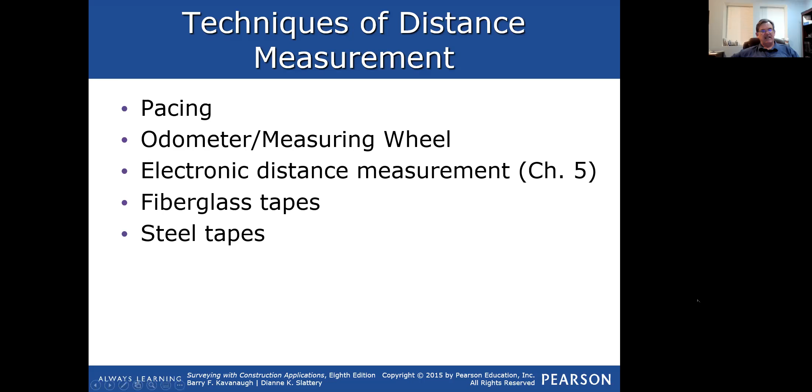The steel tapes were very accurate and very good, and it's just not something that is used as much anymore, but it works the same as any other type of measuring tape. So those are the types of measurements or the tools that you would use.

We're not really going to deal too much - I'm not going to ask you much about the steel tape, the graduations, or the cut tapes and add tapes. Let me see what this one here is. This is an add tape. All right, if you notice this, I'm not going to be able to zoom in too much here.

No, yeah, I can. I get it.

So a lot of tapes are measured directly. Some of them were like this. You'd hold it, and the tapes I saw had no intermediate graduations like this. So today you're not going to see too many of those. The book makes reference to it, but I don't think I asked you anything about it.

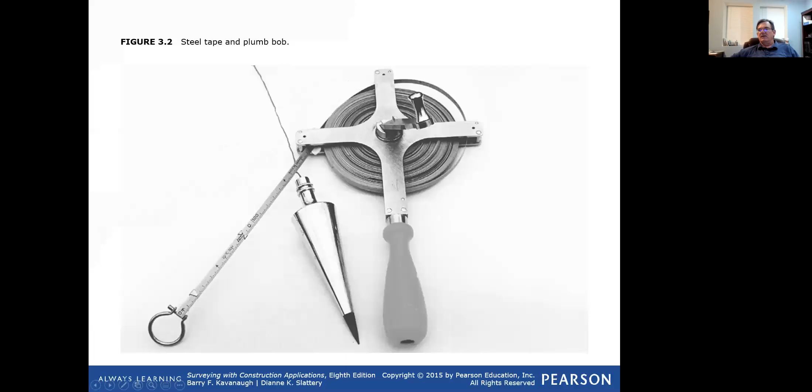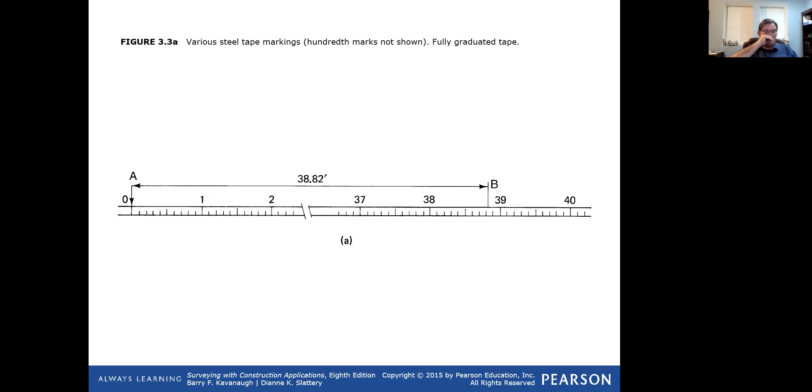You can see here various steel tapes. They're hundredths of a foot. You can buy fiberglass tapes done the same way, marked in hundredths of a foot, or you can buy them in inches. Surveyors work in hundredths of a foot, if you haven't figured that out by now. And the reason for that is it's easier than fractions. That is the main reason, it's simpler than fractions.

Let's see here, taping accessories, chaining accessories. If you're going to use a steel chain, you need a tension handle. If any of you have seen a fence, they have tensioners that pull the wire and make it tight. If you're working on a car and you want to take off your fan belt or serpentine belt, there's a belt tensioner that pulls the belt tight. Same thing with a steel tape. If we want to be accurate, we have to pull the tape at a certain tension, and that would be taken into account with this tension handle.

A lot of them actually had a little gauge on them to tell you how many pounds per foot you're pulling. Range poles are not something we're going to talk much about. A clinometer is something that measures your slope in percentages.

A hand level is literally something that you look at. It has a little bubble inside. One of my videos has a demonstration of a hand level. You look through it, you see a little bubble, and it tells you what's level at eye level.

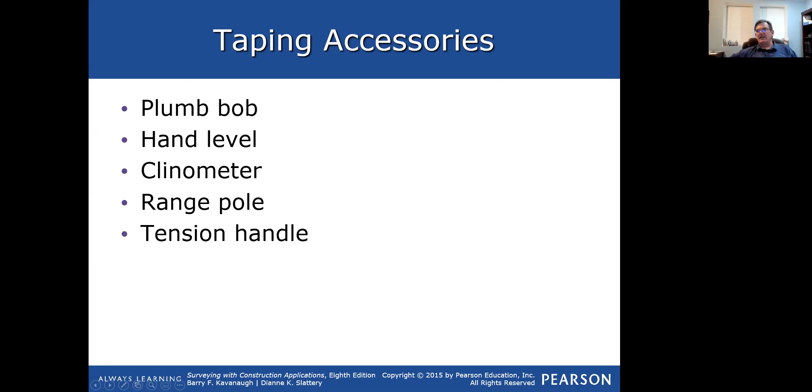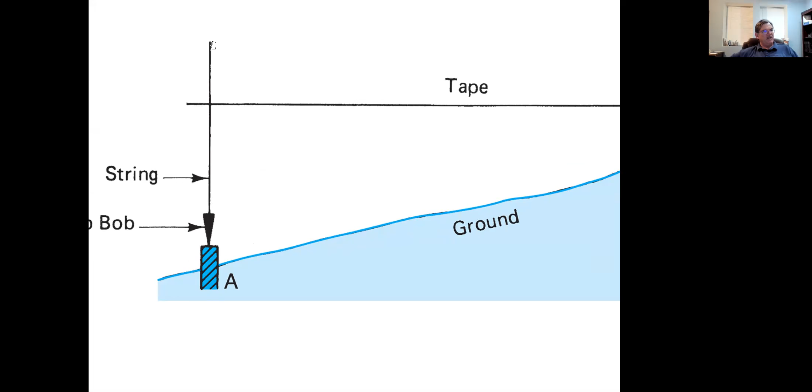And the plumb bob is something that we definitely want to draw attention to. The plumb bob is this shape, and somewhere there's going to be a picture of one, but it's this trapezoidal, triangular shape. It's a cone with a string on the end of it, and that always falls plumb to the center of gravity, so it makes this string a very taut, straight line for you to measure with. Plumb bobs are used by carpenters to check if a wall is truly vertical or not, or the word is out of plumb for something that would be crooked or tilting one way or another.

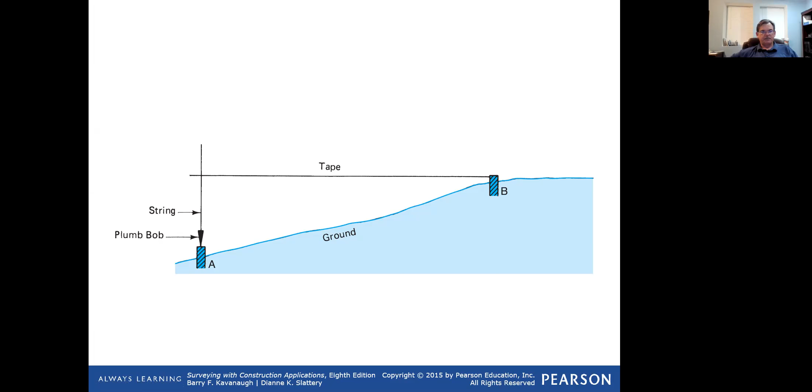This is a hand level. It's an old style one, but some people call them Locke levels. This right here, you can see on the inside, enabled you to look through something. As you tilted it up and down, you would find out when you were level, and then you would be able to read a location on a person's body or somewhere else that said, hey, this is level with my eye on that person, or that stake or stick or anything like that.

So they're fair. Not a lot of people have them anymore, but you see more of these being used in construction management and construction companies than you do by surveyors.

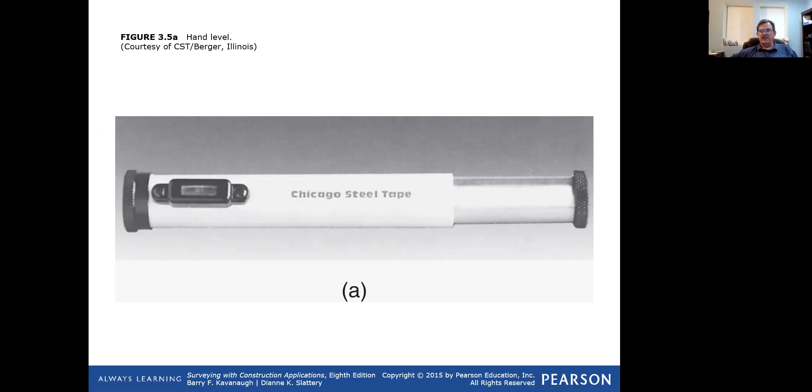And this is the application of it. You want to be able to measure horizontal distance, so you'd use this hand level, and you notice, hey, at my eyes, I'm level with your knee. And so you would now know that we could measure a distance right here, and it would be pretty close to a true horizontal distance.

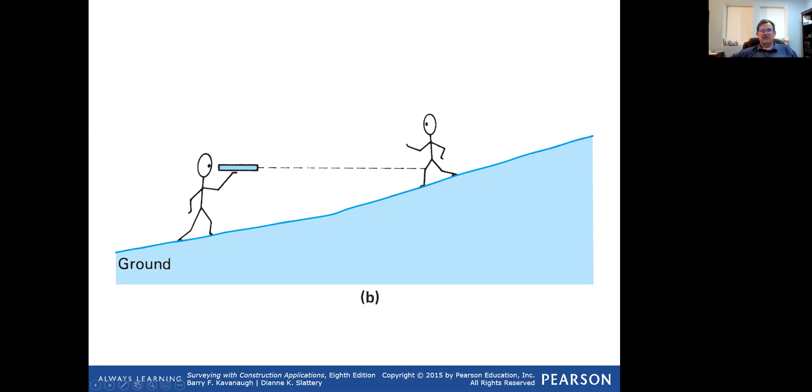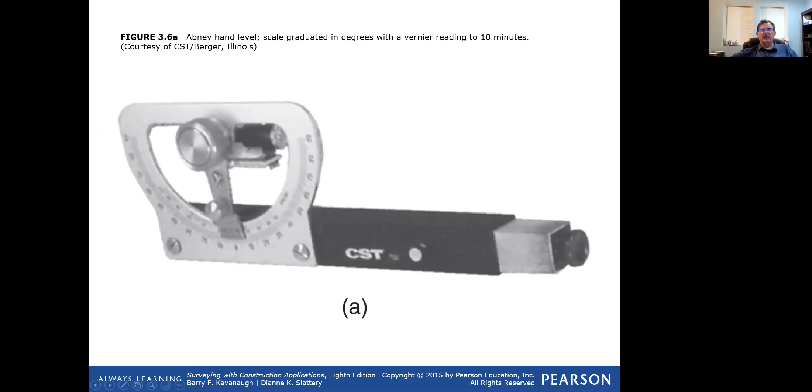This is a graduated hand level, not something used very often—I've never used anything like it. This book has old pictures of equipment. This part will help you look at an angle, so you could tilt it to look downhill at a 2-degree or 5-degree angle, or uphill at a certain slope. Just by adjusting this, it lets you know when you're looking up or down and perfectly straight. But I don't see too many of those anymore.

This type of setup, if you're trying to get over top of something and figure out the height, that's what it was talking about, using the hand level. People just don't do that too often.

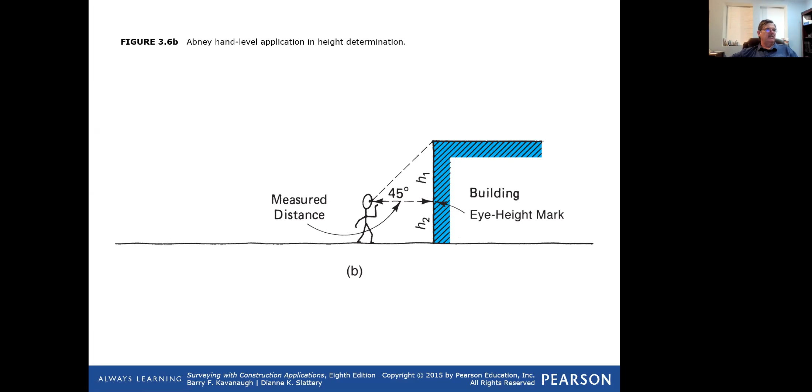I have had a field crew use a clinometer, which measured slope and height, and we were able to utilize it to measure the height of trees at the St. Mary's County Airport. Trees over a certain height were coming down, so we had the job of getting every single tree, getting a height, and putting a tag on it so somebody could determine whether or not it had to come down.

This type of diagram is something you would really do in life. You wouldn't really do it with the hand level and the tape though—you'd use something like this with a stadia rod, which we're going to talk about more in chapter 4, but it is something you would actually do.

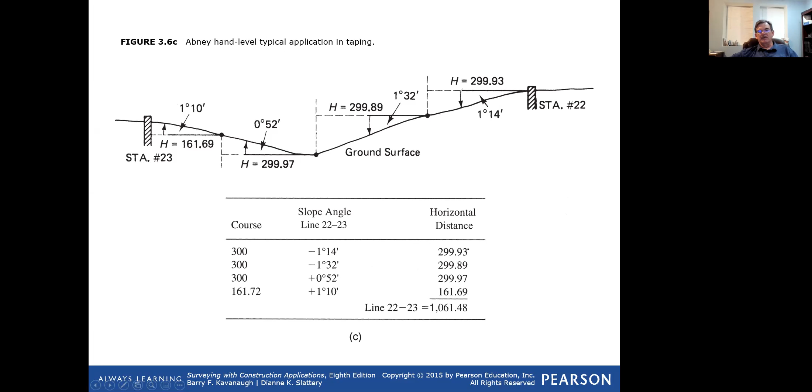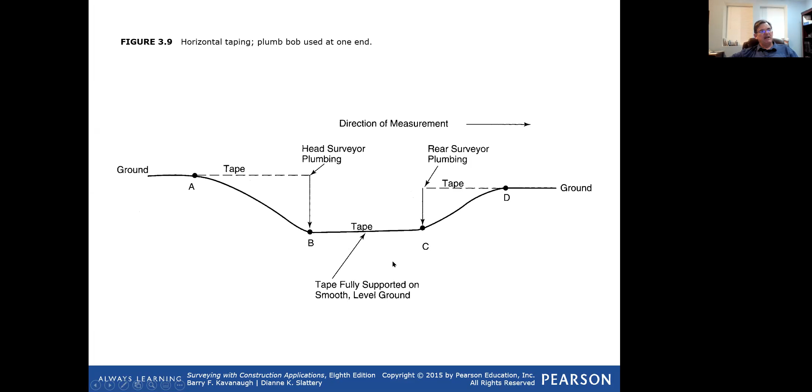Here, this one shows it being supported on the ground. And again here, we were using the hand level to get a level location and measure from there. That's how you actually measure something and get the horizontal distance from A to D, even though the land is dropping and rolling and back up again. That is a perfectly good technique.

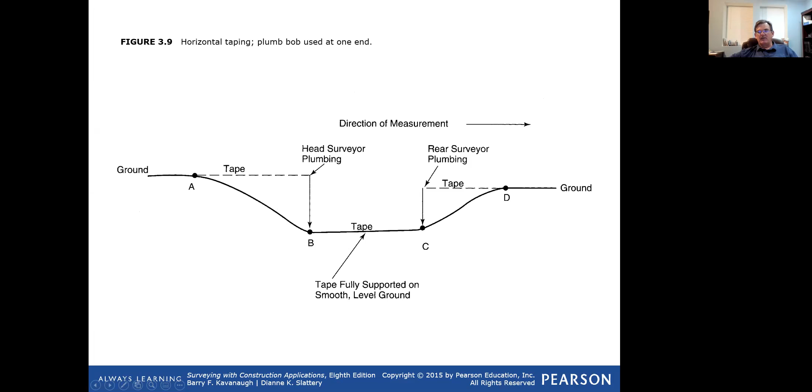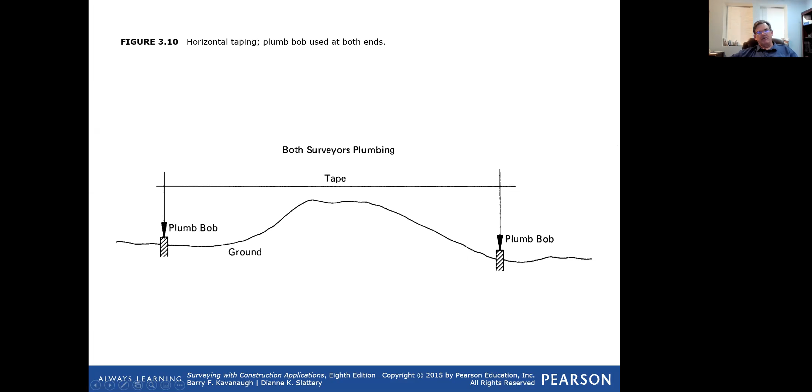Surveyors rarely ever use slope distances. They have been used in the past on mountainous terrain, even here in Maryland, out in Western Maryland, Garrett County, but not any longer. Now everything is done horizontally, but you may encounter slope distances if you're ever buying property or doing work in the mountains.

The book talks about steel tapes and lectures a bit on them. Keep in mind that steel is affected by temperature and by tension. If something is hot, steel can pull further apart. If something is cold, you can't pull it apart, and it shrinks. So temperature changes the actual measurement, and so does barometric pressure to some degree.

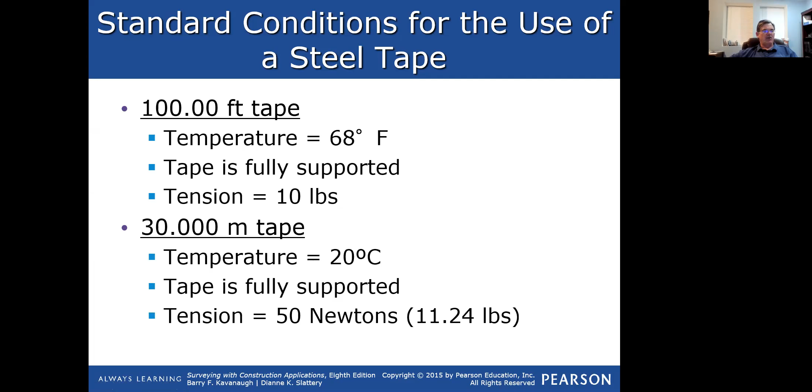There is a lengthy formula called a chaining formula to fix and correct all the different things that go wrong with taping. It is not something you have to worry about if you just pull it fairly tight—make sure you're level, and you'll get a pretty good answer.

Now, that's a steel tape—not a lot of people use steel tapes anymore. But what I do want you to understand is that when you're using a steel tape or even a fiberglass tape, you have these type of errors involved all the time. You can't measure on a slope; you've got to try to stay level.

What if your tape measure is broken? I have one that's missing the first 2 feet. Sounds silly, huh? Well, it was a tape I found that was 300 feet long. You don't find many of them 300 feet long, and every now and then I have a shopping center or somewhere where I need to measure something over 200 feet, so I'll use my cloth tape.

So I have to remember I'm missing 2 feet, giving an erroneous length when I read. Temperature doesn't come into play too much with fiberglass or cloth tapes. Tension and sag do, though. You've got to be able to pull that tape tight and get the sag out of it, or else you're getting a bad reading. So that's something that is relatively important.

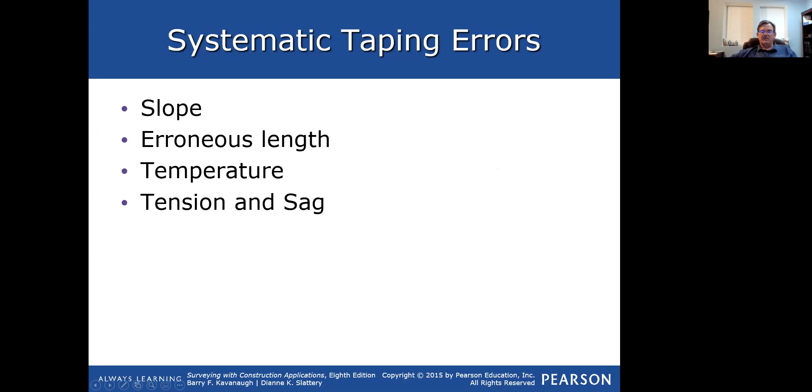Sometimes, let's say you had a 50-foot tape and you needed to measure 75 feet. You'd have an alignment problem possibly, in that maybe you're not measuring straight. You can only go 50 feet at a time, so you have to stay straight between A and B while you measure the first 50 feet. Then you would mark that spot on the ground, and use your plumb bob on both ends to make sure you're going straight and keeping things level. These come into factors whether it's steel or fiberglass tapes.

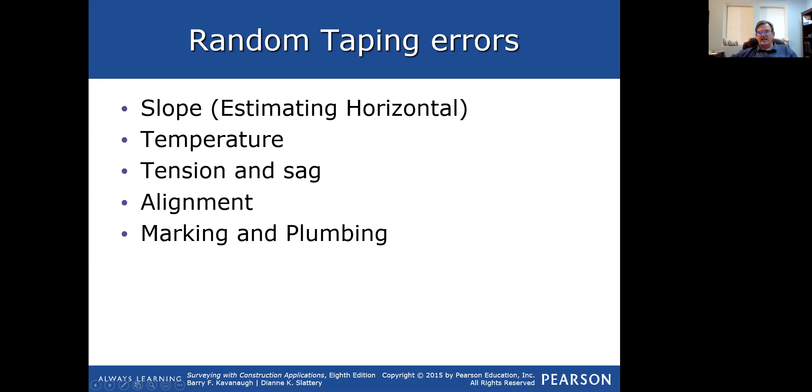Again, here are some of your possible errors. I didn't ask you anything about that—there's no reason to ask you about things that we don't really take into account or do anymore.

This right here is really just a way of measuring and checking distances, front and back, getting averages, so you have an idea that you're doing repeat measurements to get something correct. You would not do this either anymore. This is not something you would need to do, or something I've ever done as a surveyor. It's just not necessary anymore.

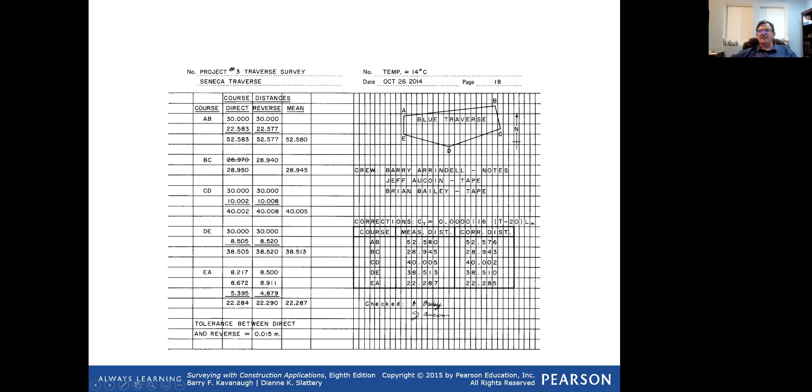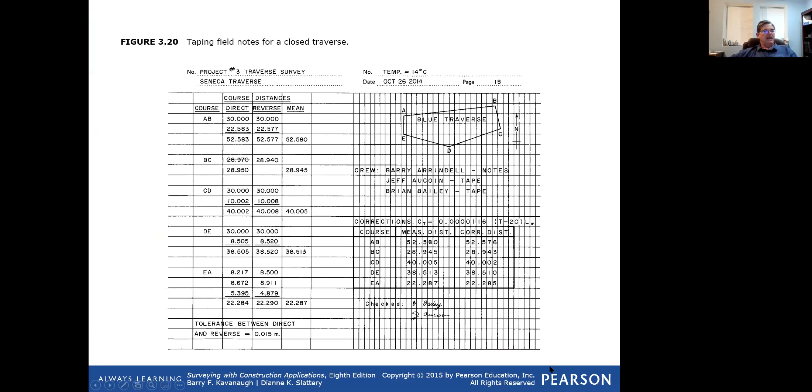One of the things I want to point out—and I'll stop my screen sharing—one of the things I want to point out is that in your book there's a type of chain that's discussed. Let me find it here, it's in 3.2.

It's called a Gunter's chain. I have a little video on it, and I asked you a couple questions. I just want you to understand what a Gunter's chain is and how important the measurement is. We don't use a Gunter's chain anymore. I used one once at a conference, where I learned how inaccurate they could be—even though they could be made as precise as they wanted—and how old surveys, from a period of time probably from the 1950s all the way back to the days of George Washington, were inaccurate with these Gunter's chains.

But a Gunter's chain is 66 feet, made up of 100 links. We have other measurements given to you here in chapter 3.2: a rod is 16.5 feet, or 25 links. 80 chains is 1 mile, and 10 square chains is 1 acre. So there are other measurements that fall into place.